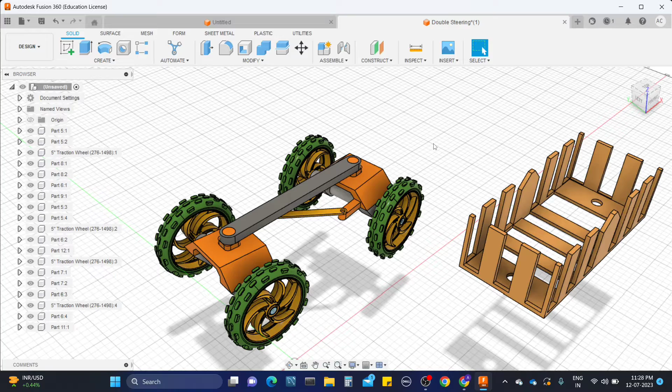So this is the model I designed in Onshape. What I need to do is the assembly for this one. So let's start the tutorial on how to do the assembly for these parts.

For now, let's keep it like this. First there is a process for that. I'm going to click on this one and click on open. I already have the step file here in the computer. Click on open, so it will load on a new tab. Here you can see the tabs are different, so it loads on another tab. Let's delete this untitled one. My software is just a bit slow, don't mind about it guys.

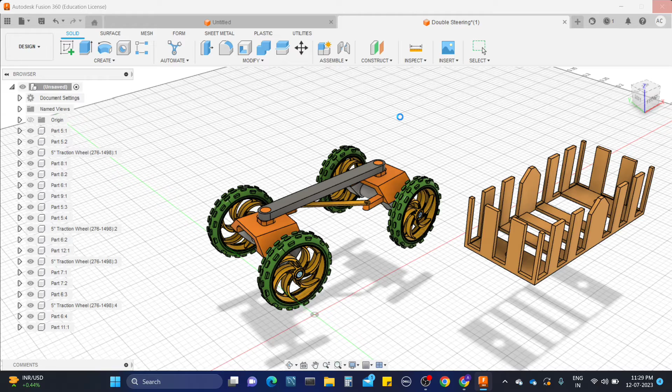We need this one, and this is the model we have imported. This is the model I imported from the file. I exported it from Onshape Studio in step file format, and here I imported it.

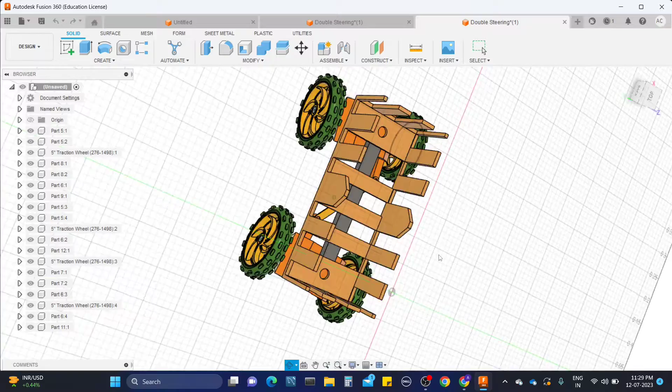Now let's do the assembly. For the beginning, let's see how the assembly works here. You can see the assembly section bar here. When I click on this one, it's asking for a new component. When I click on new component, it means it's like a part, guys. Every component should be separate, unlike in the Onshape CAD software where we just import it because they have different tabs. But here in the same tab we are working, so it might confuse you. When working with assembly, you should make every part into a component, then only we can able to do...

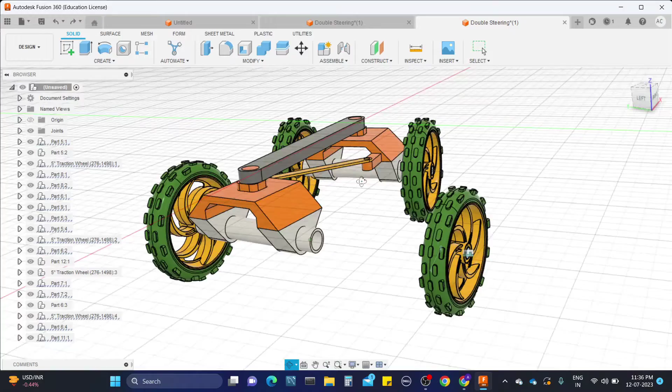Okay, let's get ready for that. Just make the wheels again and again. I'm going to skip showing the assembly of each wheel size and just make every wheel assembly for now. Assemble the wheels, guys. Now we need to assemble the body.

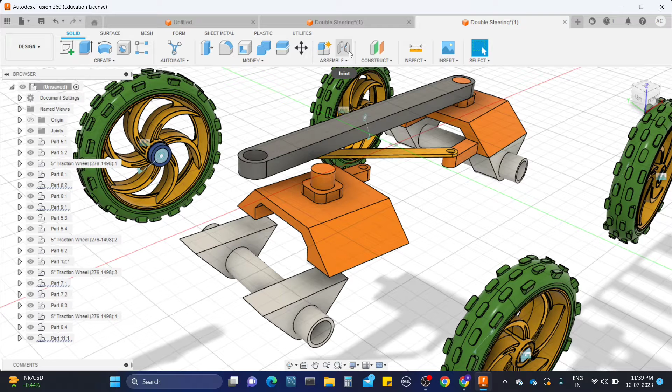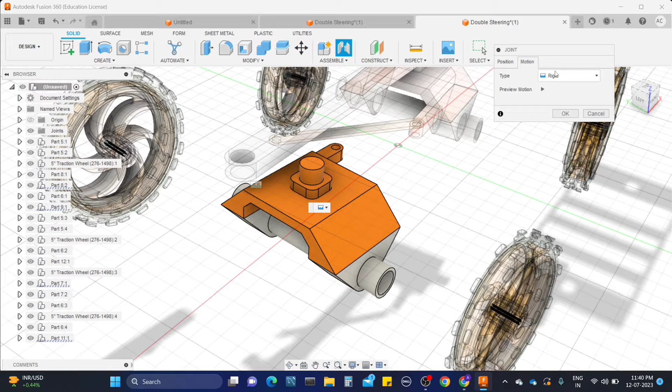So how can we do that? We just need to pull the part and make this part fixed right here. For that, click on joint again, and you can see the components we need to fix. Place the cursor on the face, it will show the points just like it shows in Onshape. Click on one side of the edge and click on another component on this edge, so they will get connected like this. You need to check the motion before, and it should be rigid, fixed.

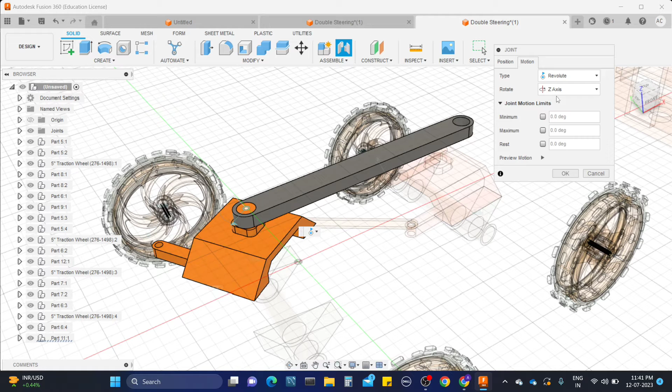Now what we need to do is add the revolute mode for this part. Click on joint again, select the face of this one, and select this face of the other one. We need to check the motion, it should be revolute, right? It will show the motion when you select that and click OK.

Now do the same for the second part also. Click on joint, select the face, select this face, make sure it's set to revolute, and click OK.

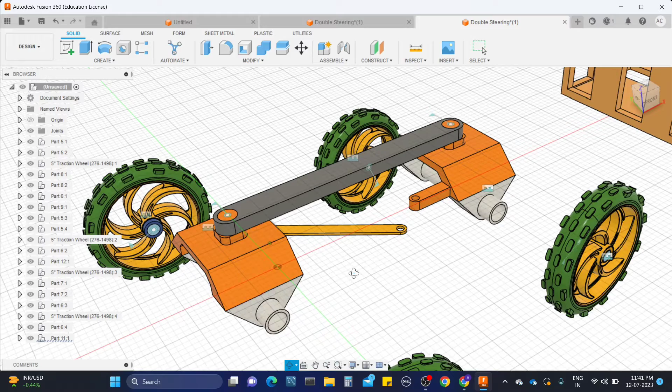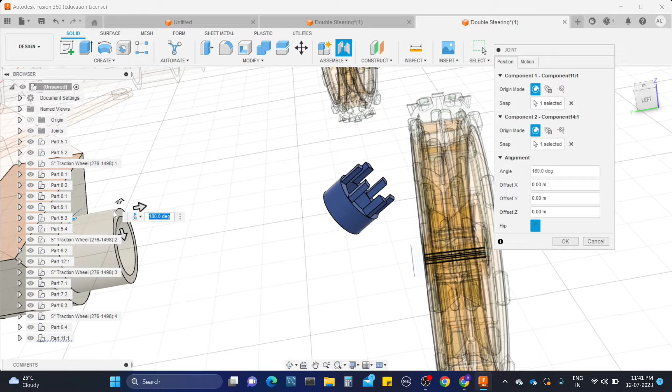Now what we need to do is fix the wheels. So how do we fix the wheels? Just like using the position move, right? Now click on joint, click on this one, and click on this component. Wait, let's undo this. Click on joint again, make sure guys where you are selecting.

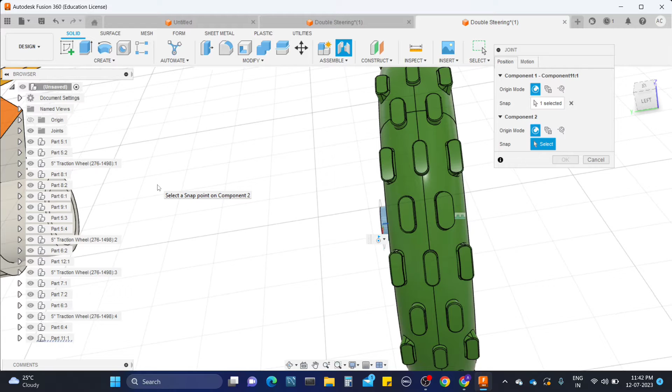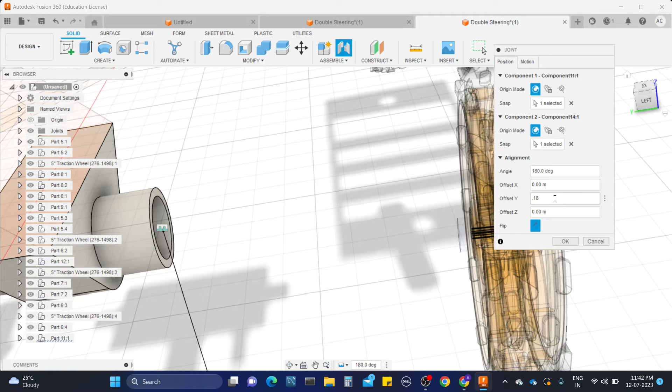Now select this component, and it should not be revolute, it should be rigid. Okay, and the position should be in which direction? See the axis from here, guys. If you are confused, you should need the y-axis. How much? 0.18 inch.

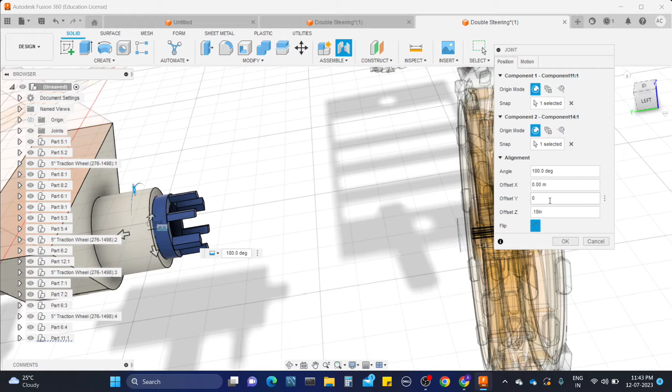So it's not showing the axis. Oh sorry, we need to set the y-axis. Okay, z-axis, because it's connected like that. Right, so 0.18 inches. And it should be 0. See? And click on OK.

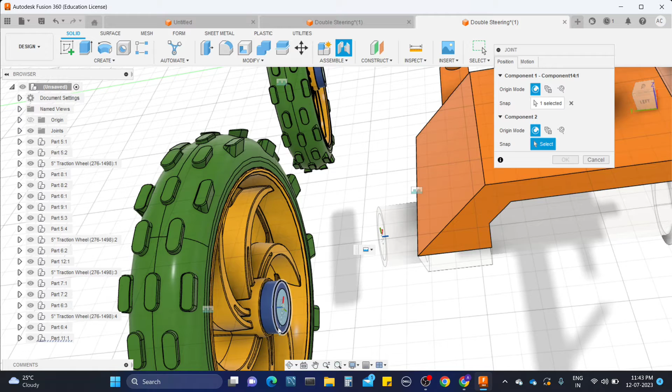Now they are attached to it as shown here, right? So we need to do the same for the other three wheels also. Click on joint, select the component, select the other component, and we need to give how much? 0.18 inch. Click OK.

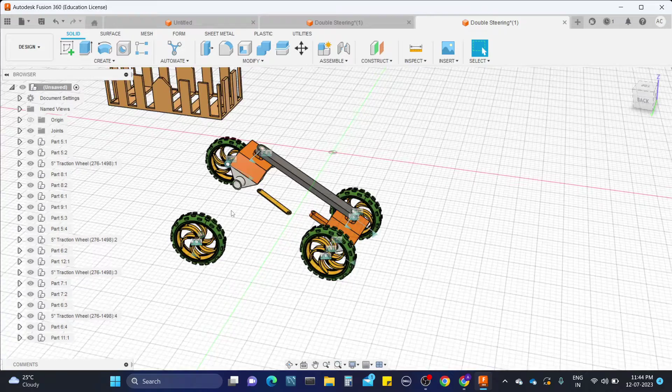Successfully added. Now fix the wheels again, same as shown before. So look at it, on joint. I'm just skipping this first, guys, because I think everyone already understands it.

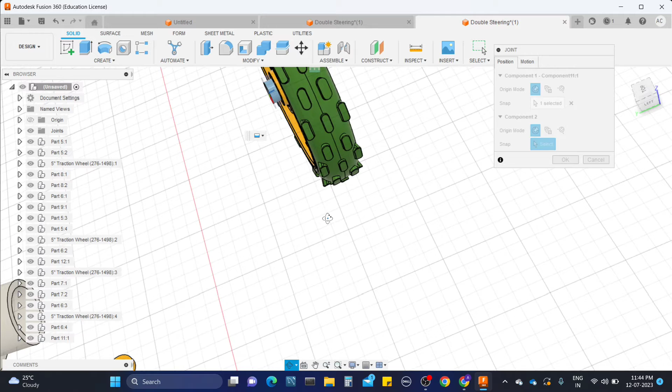Now we successfully added the parts. Okay, now we must rotate this one. So how to do that? Now we need to move this assembly parallel to the base.

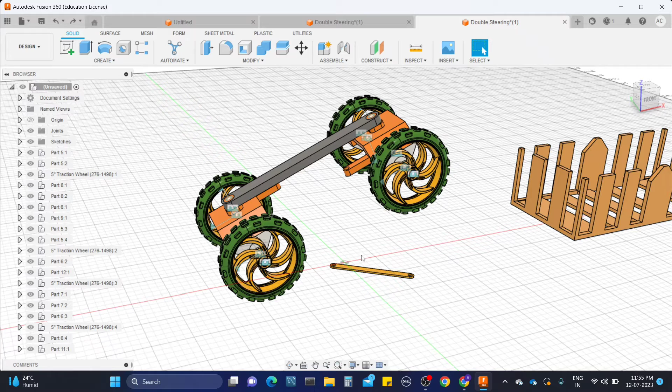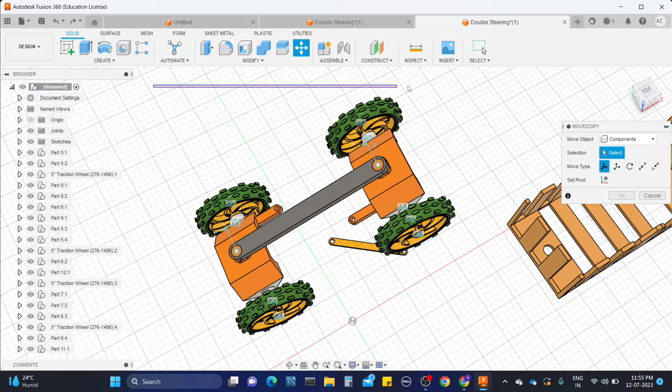So for that we are going to use the move tool you can see. First select the move tool, and we need to select the components. Instead of one component, we are going to select all components together, so that the whole assembly will move into the correct position, not a single part, guys. Just drag it again using right click or left click, and the whole assembly should get selected, and now here you can see the gizmo is formed.

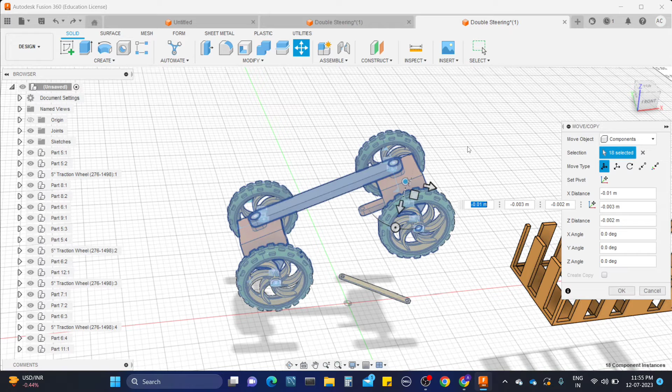Bring that node to the center of the assembly, like the gray part which is available there. So click on the node right here and bring it to center. Now move this part into the center position. Okay now click OK. Now just move again so the whole assembly will move, which means to rotate, and this much angle is enough for us.

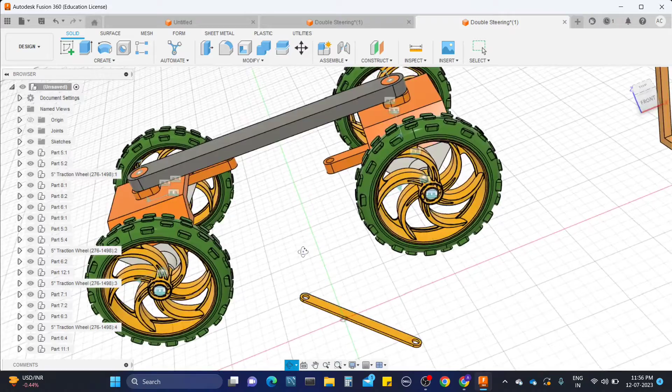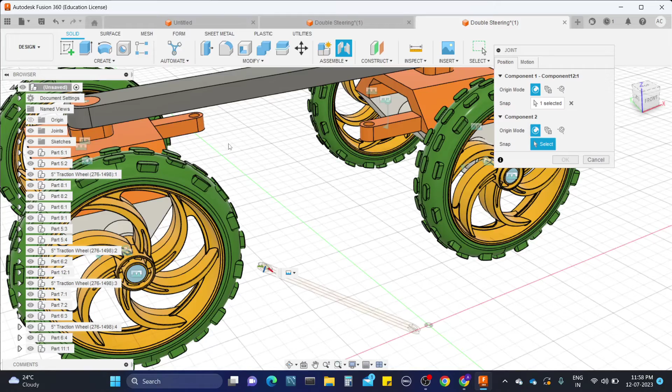Now click OK. Now what we need to do is make this part fixed, then only we can do the assembly of this part, or else when we want to perform the animation it helps us. So to fix this part we need to click on joint again, click zoom in, click on the face, and click on this face.

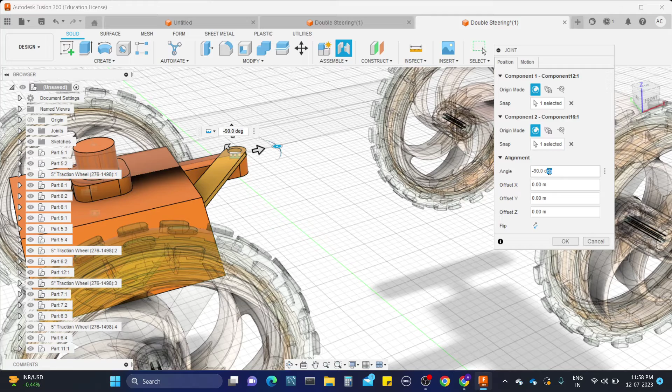Now keep it, and we need to rotate right. It should be there. I think yeah, we need to rotate. Take minus 90 degrees. Now it's fixed.

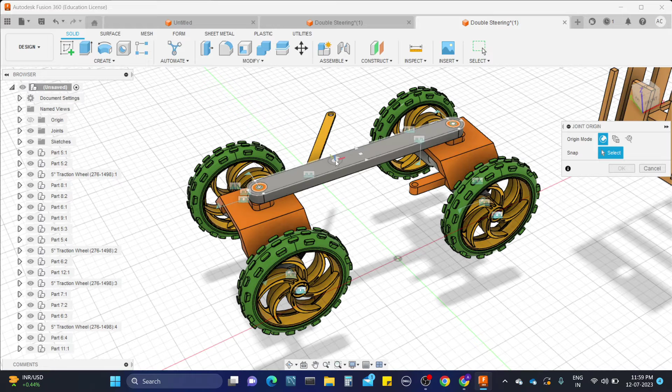Just move the part. Just we need to make the whole assembly fixed, because it's already moved, right? So for that we need to click on this one and rigid group. Okay, that is the mid connector, guys.

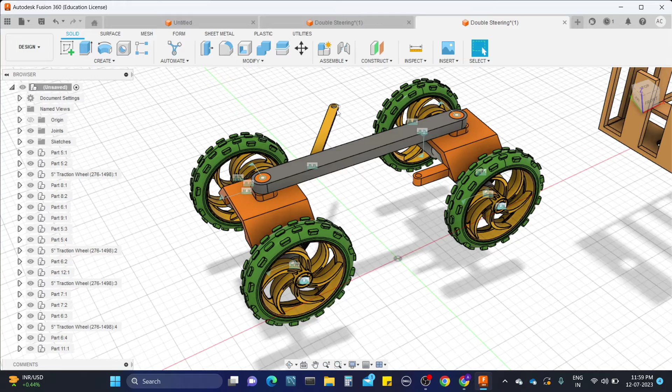We need to rigid group. Click on this one and click on this one. Now click OK. So the part, okay it's still moving onto this. Let's make the assembly. Click on joint again.

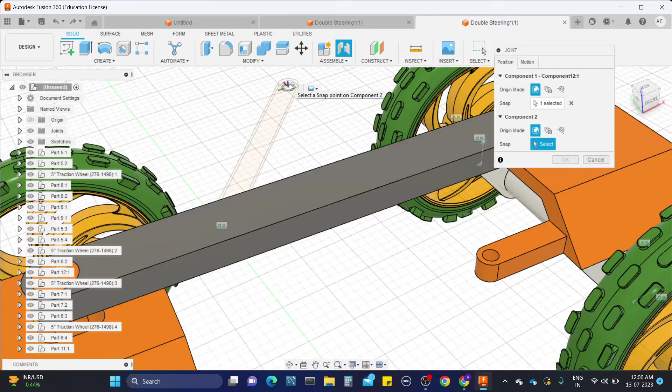Select the face. I think we show the below face, right? And select it, select the below face and this face. Now click OK.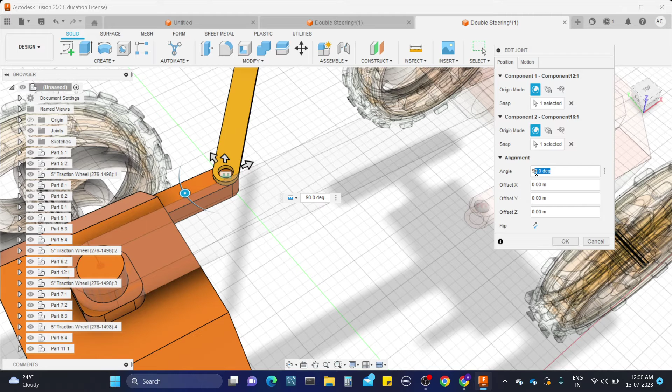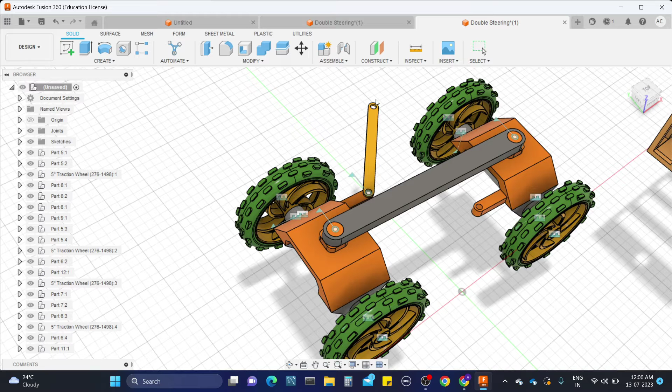Now do the same joint again. Click on the below edge and select this edge. Make sure what position you're giving, it should be this, and now click OK.

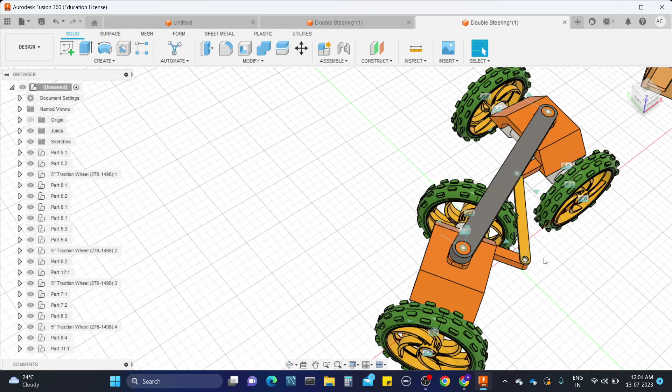But see how they are turning into this because we didn't fix this part. That is the main thing. So let's make the parts rigid and perform it.

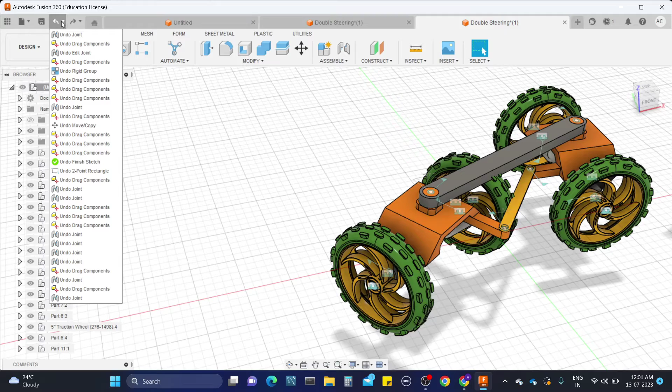I'm going to undo this motion animation again. Okay, let's make this part fixed for now.

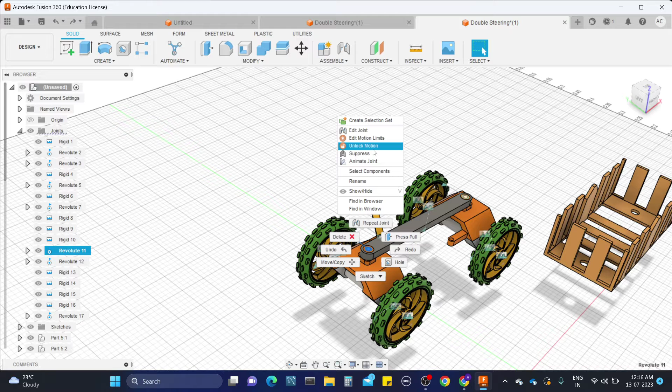Now finally we fixed the position of first wheel, wheel one, and let's lock the motion of this one so it will not move when we assemble the part. Later we can unlock the motion.

Now what we need to do? Select the face of the part again. Select the joint, select the face and select this edge off. Now it will move and it will rotate. Now check on the motion and now click OK.

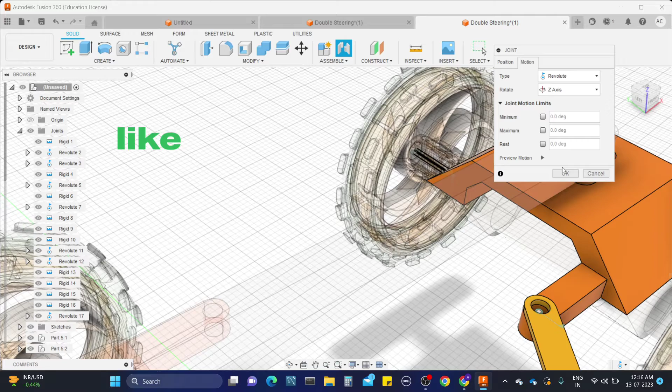See, now they are in good position. Now we need to unlock the motion again.

Now what we need to do is, while doing assembly, we need to attach that load carrier to this frame. For that we are going to use the same fasten joint again here.

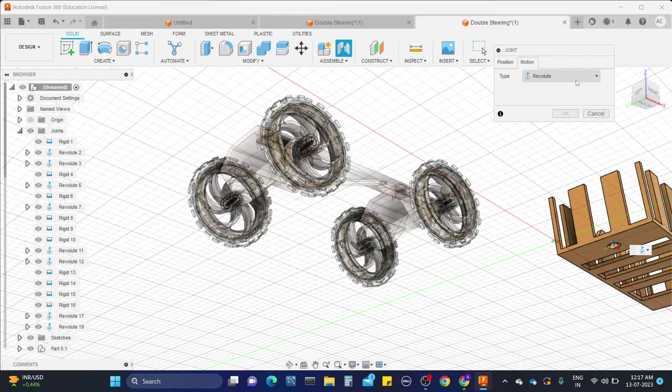Click on the joint, select the end face. I'm selecting the edge here. Now select it as a rigid motion, and select the one edge of this frame, and now click OK.

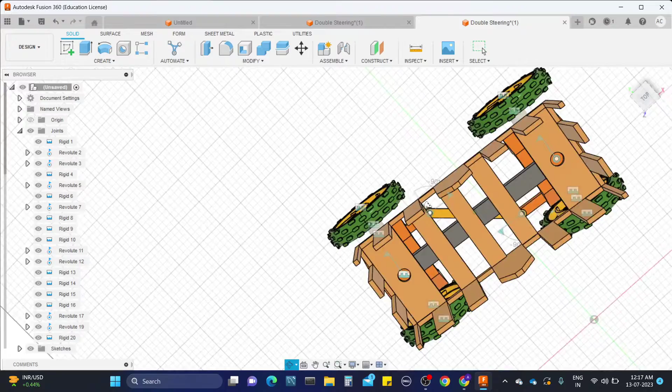Now we finally did the total assembly of the double Ackermann steering mechanism in Fusion 360. Now let's work with the animation. How does it work in Fusion 360? I'm going to show you now, watch it completely.

Okay, here you can see the mate connectors are clearly visible. It's showing the mate connectors, what they are fixed for the parts. Now I'm going to show the rotation motion of the mate connector.

So from here also you can check it. Right click there and you can see the motion, or motion with relation. Let me show the motion one.

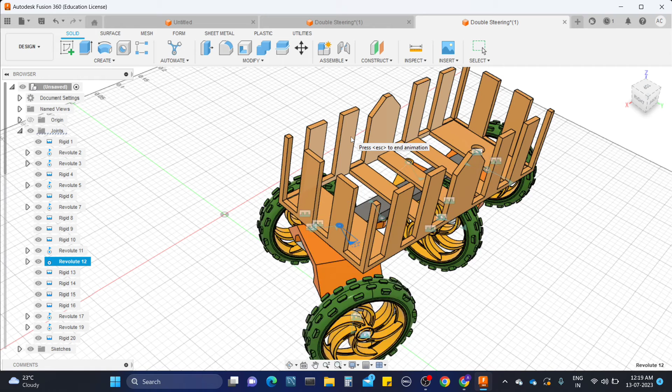Okay, now when you click on motion, see only the one part is showing rotate. How is it rotating or moving in the assembly? So it will not mix with the other. When you click on motion with relation, see the other part also rotating, because they are mutually connected to every part with mate connectors.

Just like how we perform the assembly in Onshape CAD software. Okay, so for that interface, first of all we need to put some limits.

I'm maintaining some limits of rotation to the front wheel axle and the rear wheel axle. I'm giving 30 degrees of limited rotation. I think 30 is enough for a rotation. Okay, 30 degrees, I think that's enough.

Now click OK. It's showing some warning, so what is that? Okay, yeah, we gave some negative value here, not positive to positive. Now I'm giving the negative value and click OK.

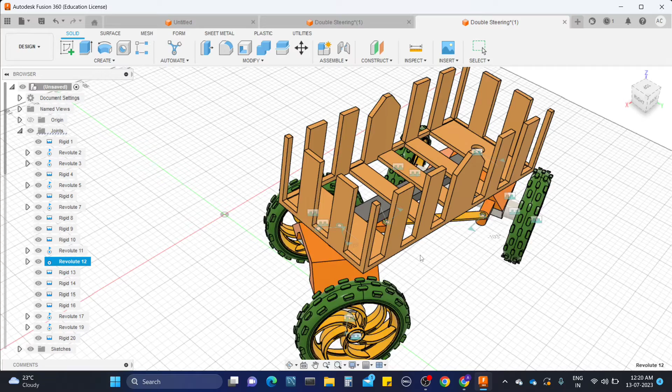Now it's working, see, now they are constrained perfectly. So when you perform the animation, you can see they are moving related to each other. As per the double Ackermann steering mechanism, it is moving exactly like that. If the front axle is moving in one direction, the rear axle is exactly moving opposite in rotation.

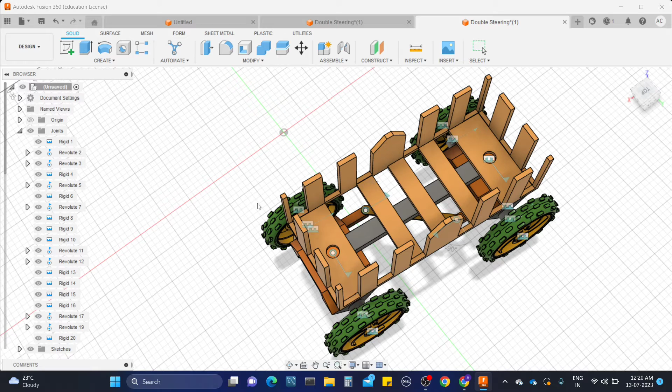So like that, see the animation, how it's working. I maintained the 30 degrees angle because, as you can see in the animation, the bar is actually parallel to it.

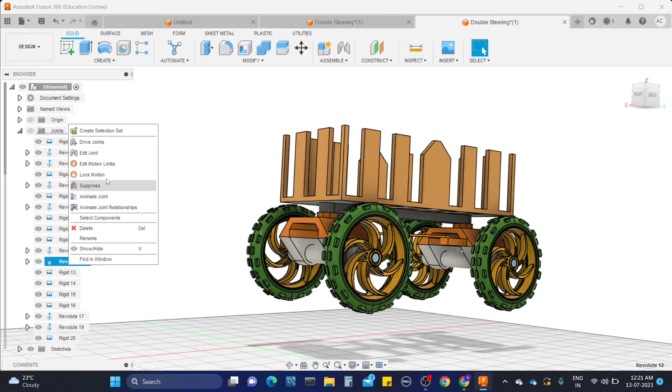Let me show you, wait. So when you see the animation, the bar is parallel to one side of the hinge of the axle. That is why we maintain the 30 degrees angle.

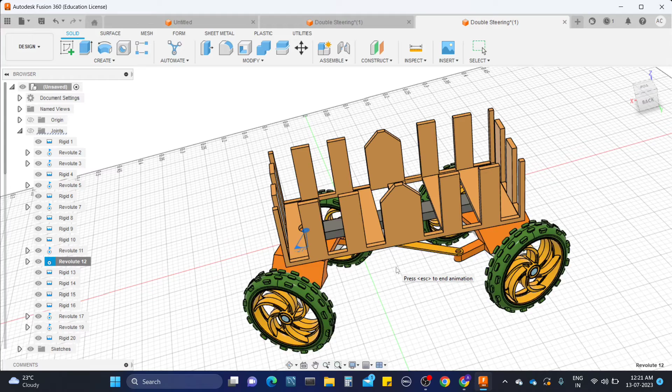You can also maintain more than that depending upon the design, and you can increase the angles. I think 30 degrees is enough for now. So 30 to 30, 60 degrees total, it is making the rotation.

Okay, now this is the animation of how it works in Fusion 360. It's also very cool. Now what we need to do is perform the wheel rotation.

So for that, you can see the motion links or something showing here. We need to give two motion connectors which are rotatable. That's what we have - rotation, I mean revolute mates.

So for that, now let me check here. Let me hide these other mate connectors. We only need revolute mates to perform the motion connection, so I'm hiding the other mate connectors here.

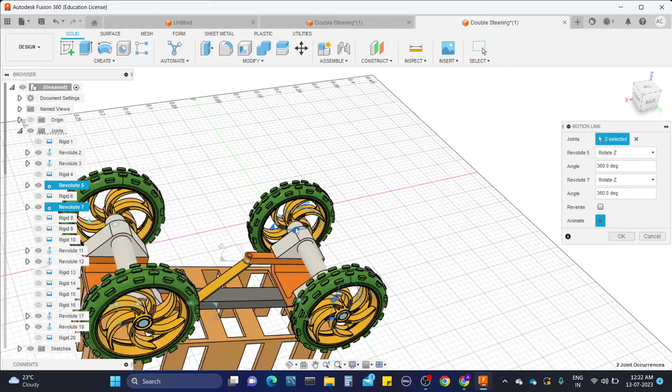Now we need to select the revolute mates only to make the motion connection between them, motion links, just like how a gear rotates. See, I selected both rotations of the other side wheels, and it is rotating like that because the part is not fixed. That's why it's rotating like that.

Okay, now see, you can also see the motion here, motion like how we can see that. Now click OK. Now when you perform the motion, see, it is rotating because we're not fixing the part yet, so it's not rotating in a regular way, not rotating at what we want.

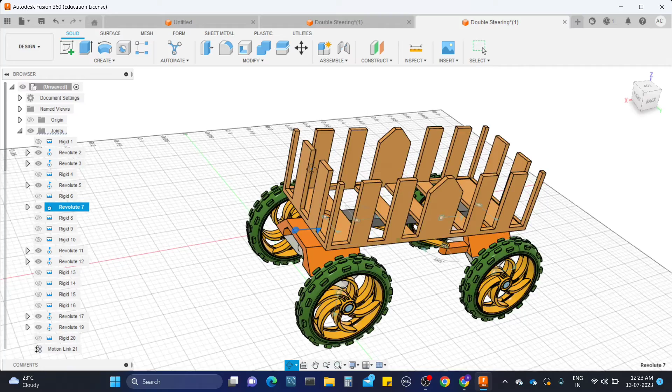For that, we need to do one thing. We need to fix the part, any of the parts, so it will not move. Like in the Onshape assembly, we use the fix tool, but in Fusion 360 we have a tool called, let me show you that.

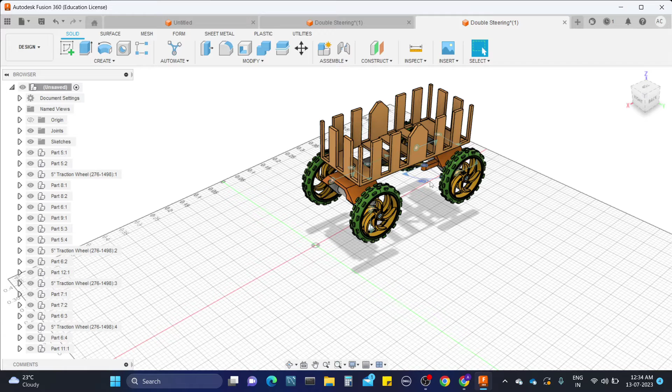I think we need to do some more operation, which is called adding gear relation to the wheels. I will make a combined video about it.

Okay, for now, we need to fix one of the parts, which we can call ground. So for that, select the part, and you can see the parts available in the list on the left side. Click on the drag button, you can see the part, and right click on it, you can see the ground option. Click on ground, then the part should be fixed.

Now you can see, if you move the wheel, only the wheel is rotating, not the whole assembly. So that's the right way we can do that. Now we need to add links like a gear relation to the wheels.

So right here you can see the motion links, and click on the revolute mates which we want to start the relation. Here you can see it also showing the motion - they are connected like a gear relation.

Now do the same for the rear wheels also. Click on motion links and click on the revolute mates. It's showing wrong, just change the direction, and now they're working in the same direction. Now click OK.

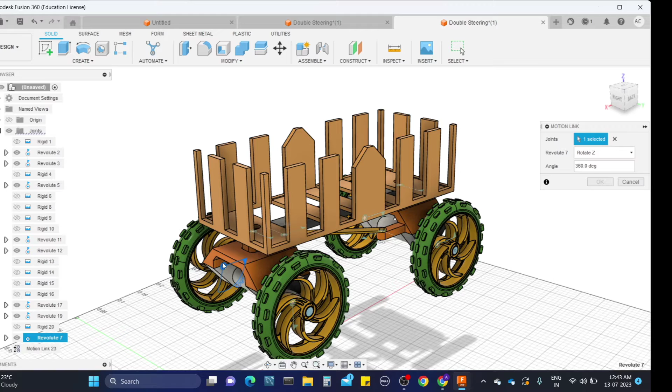Now we need to add another motion link for front wheels and rear wheels. So I'm selecting one wheel, and see, now it is totally connected. Now the four wheels are rotating each other.

Now right click on one mate and click on motion link. Now see, all the wheels are rotating like this. This is the animation with relation I did.

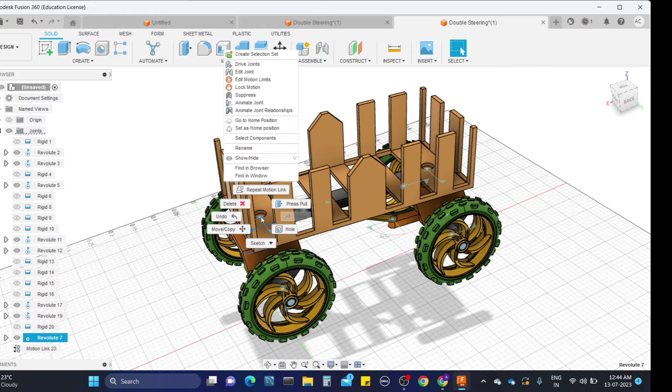Like this you can perform the animations in Fusion 360 using assembly mate connectors. I hope you understand what I'm trying to teach you in the Fusion 360 assembly section. Now you can also see this motion, the wheels are actually rotating and linked. If you want to rotate this link, see, they are also working with the motion link.

That is how we can perform the animation in Fusion 360 software, guys.

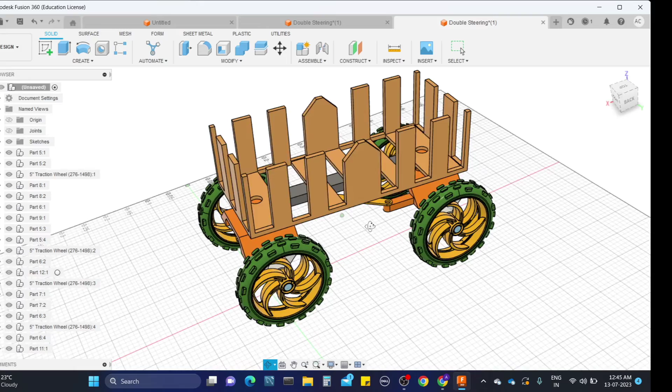Now what we need to do is let's do the rendering of this model. So how can you do that? Right here you can see the design tab. When you click on it, you get into render. Click on the design panel and you can see the render option, and we come into the render section. This is the primary view, guys.

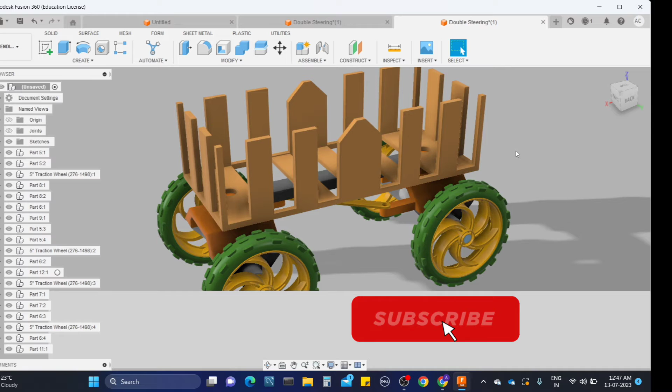Now we need to add appearances to every part of the model. As per my wish, I'm going to add the materials first. Even you can add as per you want, it's not mandatory. Just click on the appearance tool, and we get several types of materials there, and from that select them.

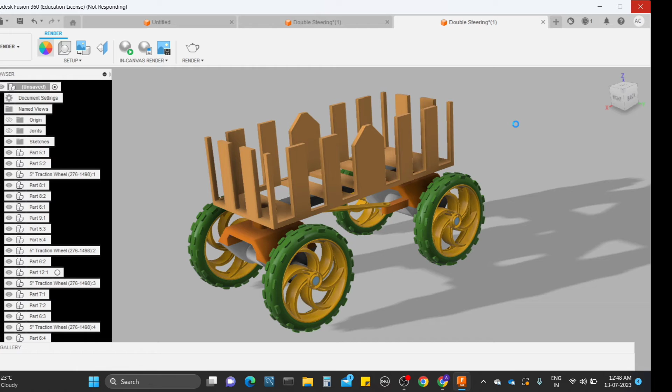Let me show you one by one. My system is slow, don't worry about it. Here you can see we get a new pop-up window, and there are so many materials available. Some of them you have to download, some of them you can use for free.

Now for example, I'm going to add wooden material to this one. We have several types of wood. See, there are so many types of woods here, and some of them you have to download, as I said. Now let me add one of these. Just click on one of the materials.

So it's showing some warning to me. I will do that later, I'm going to use other materials for now. Sorry, it skipped somewhere. Yeah, it's there right here.

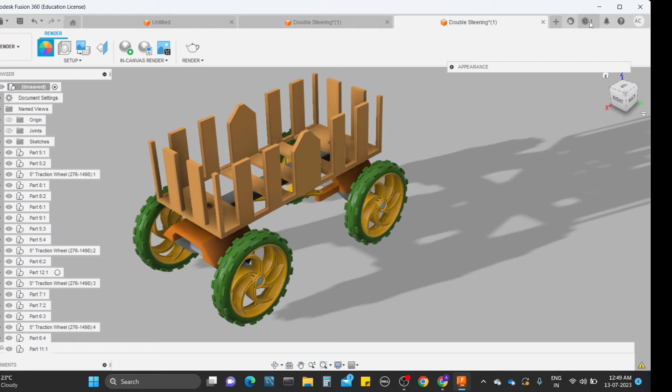Now you can see the design panel opening again with appearances, and here I am going to select the wooden which is free. Click on one type of wood, and you have several types of wooden right here. Just drag it and place it there. Now the appearance of the part is changed like this, you can see how I am dragging. You can change the appearances as per you want.

Like this you can change it, even for wheels, even for bodies, even for faces you can also do that. You can see the option there for bodies and faces. That is how you want to do it. If you want to delete, you can click on delete the materials.

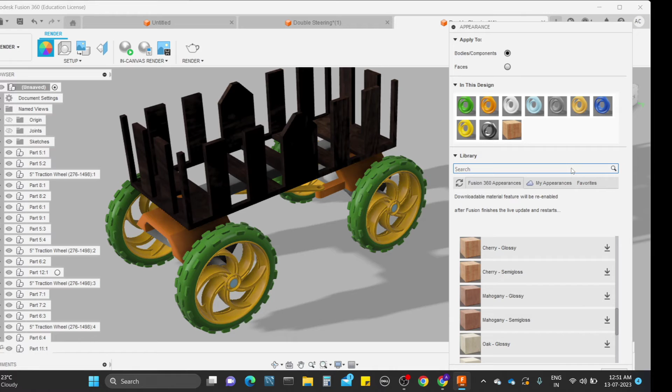I'm going to skip this rendering, how to attach the rendering to the parts. I'm pushing forward so it will save time.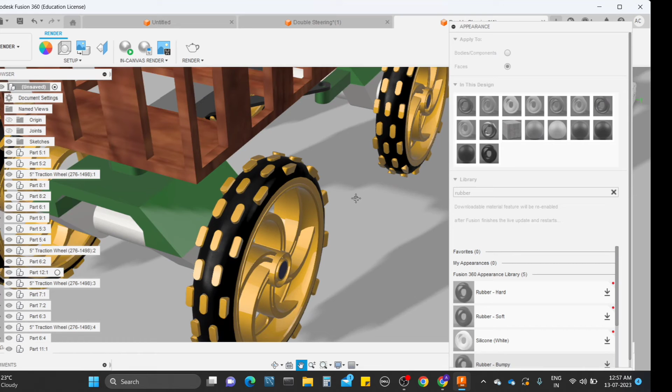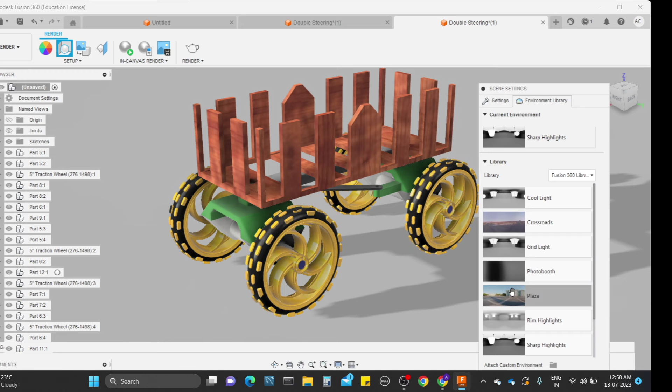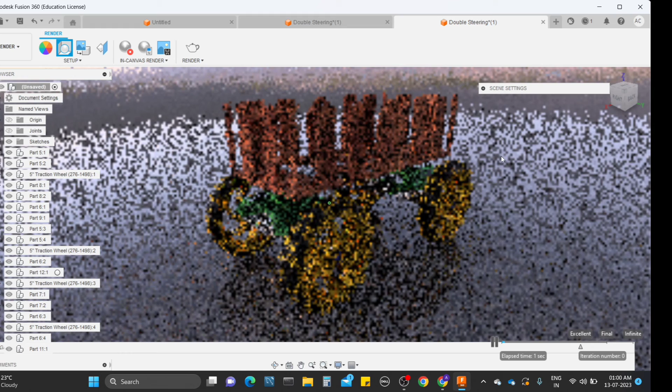Like this you can attach the things to the model background and make the views good as shown here. After completing the renderings and scenes, click on in-canvas render, so the whole rendering process will take place. Depending upon your system configuration or graphic card, the rendering will come out. And this is the final one, guys.

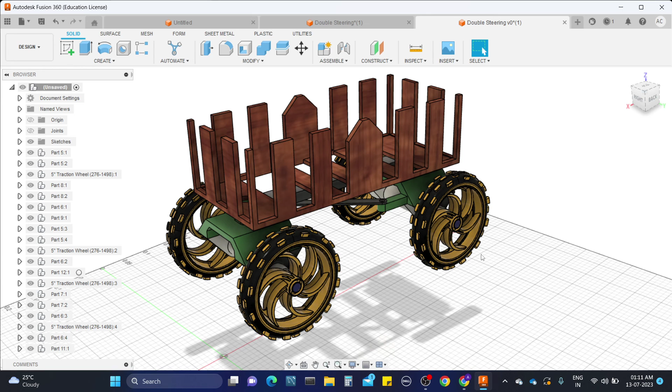So I hope you might understand what I'm trying to teach you about migrating files from one CAD software to this CAD software.